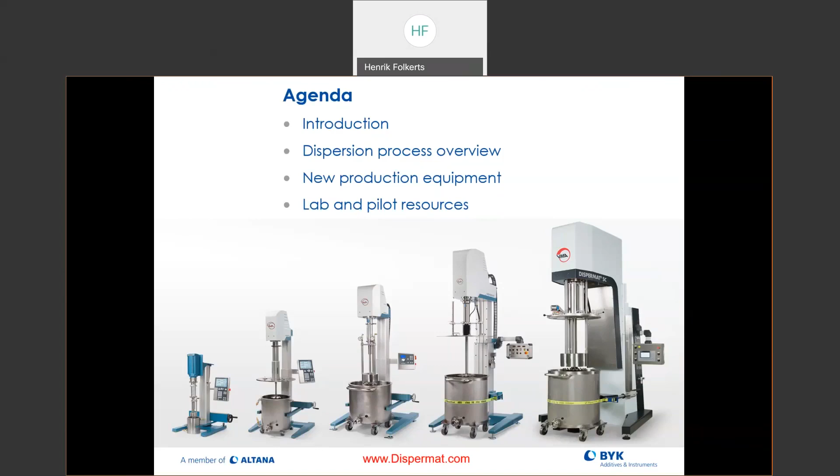Briefly, the company VMA, the Dispermat company, was founded in 1972 by this really beautiful couple, Hermann and Elke Getzmann. Believe it or not, Hermann is still active in the business today. His two sons, Christian and Martin, are running the company, and his wife Elke retired a couple years ago from accounting. But Hermann is still in there a few times a week to make sure they still follow his design philosophy, and he's a great presence.

The first Dispermat was introduced in 1973, almost 50 years ago, and believe it or not, we still have some customers running, even in the US, that imported those machines in the late 70s, early 80s, running on the original motors from the first Dispermat edition that came out in 1973. Even today they're still working just fine. The only thing they updated were the control boxes, but that speaks to the quality of the motors - they're just unbelievable.

BYK has had a really good relationship with VMA since the mid-80s, and all of our manufacturing sites and laboratories use VMA equipment. We started distributing the product line exclusively in the US and Canada in 1988. About 3 years ago, we made a decision to introduce production equipment to North America, and it's been very successful because of some differences I'll share with you as to why this is really good technology to use in manufacturing.

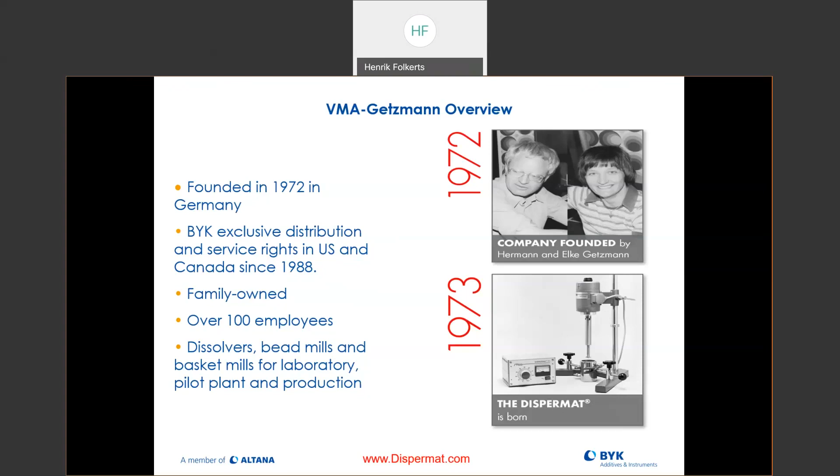So right there is the facility. The building back here is the new building that was added 2 years ago, so they have a lot more production capability. There's a new design center, more office space, as well as warehousing space for raw materials. VMA is known to really make a lot of custom products - probably 40% of all the equipment that VMA manufactures is custom to meet our different requirements.

We also have very good laboratory capabilities for lab, pilot, and production upscale to show our customers how well the equipment performs. We are actually building a pilot facility in Wallingford that gives us additional capabilities, probably later this year or early next year.

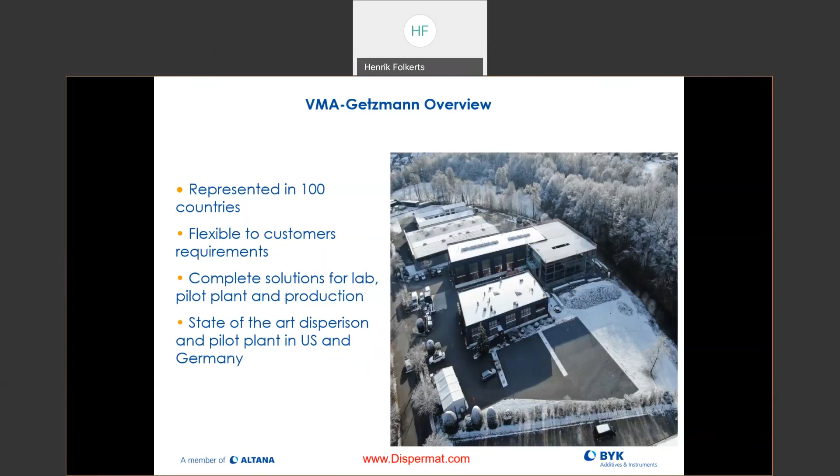Going right into the dispersion process, what's really important is to understand that pigments flock together. These van der Waals forces basically are binding forces that turn the pigments into agglomerates. The whole idea of the dispersion process is to really break up these binding forces, turn them into smaller particle clusters called aggregates. We do that with the dissolver.

And then if we want to go down to the primary particle size, we really need to do media milling with either a horizontal bead mill, a basket mill, or some other type of bead mill or three-roll mill that has enough shear power to really break up these aggregates into smaller particles. And then at the end, when we achieve our goal, we need to stabilize these smaller particles. So we have a lot of different additives through our sister company that we could review with you to help stabilize our small particles in the suspension.

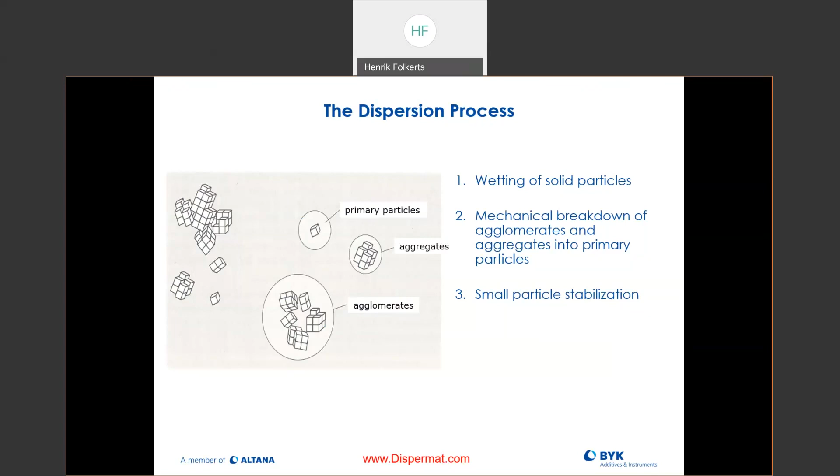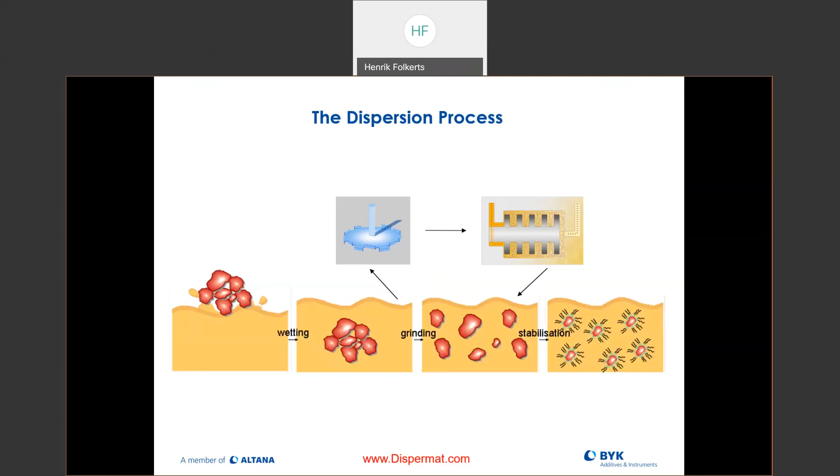So this is a great slide, I really like it. It shows you the steps. We're going to first do the deagglomeration and the wetting with our cowles blade. And then if we want to further separate these binding forces down to the primary particle size, we need to do the grinding with the media mills. And then at the end, we do the stabilization with the additives.

So it's just a quick slide showing you the difference in particle size from the various pigments that are out there. Probably a lot of you are very familiar with some of those.

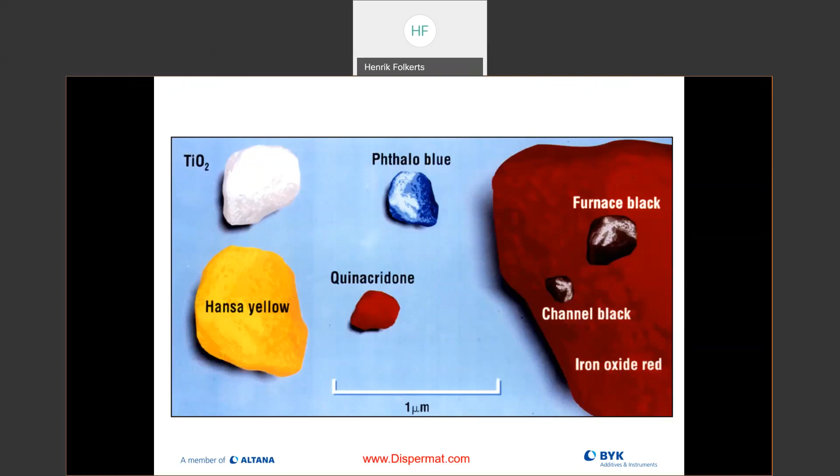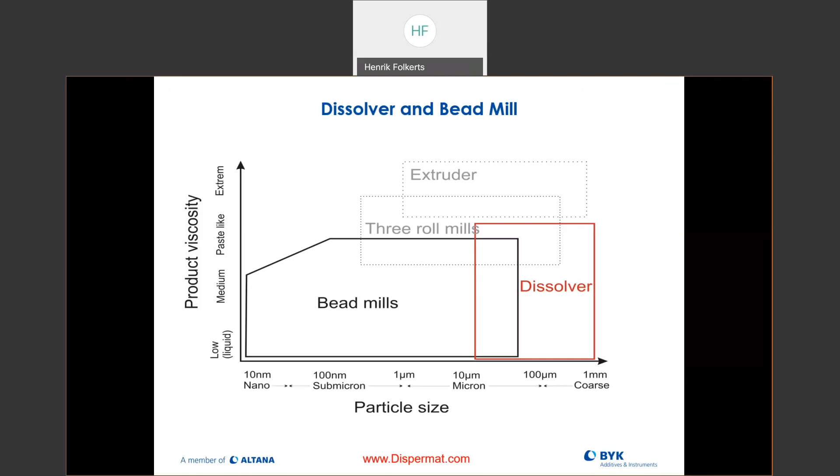So for that, we have different types of equipment. For these two processes, for the pre-dispersion we have the dissolvers, and for production we have the Dispermat SC, which we're going to cover. What's important to remember is the tip speed always needs to be between 18 to 25 meters per second. That's the rule of thumb, and that's where we optimize our dispersion process.

When we go over to the fine dispersion, or milling, or grinding, the tip speed of our rotor is slower, about 10 to 16 meters per second. That's just the rule of thumb. And for that, we have different types of milling systems: vertical bead mills, basket mills, or horizontal bead mills, and we cover all of those with the different technologies that are available.

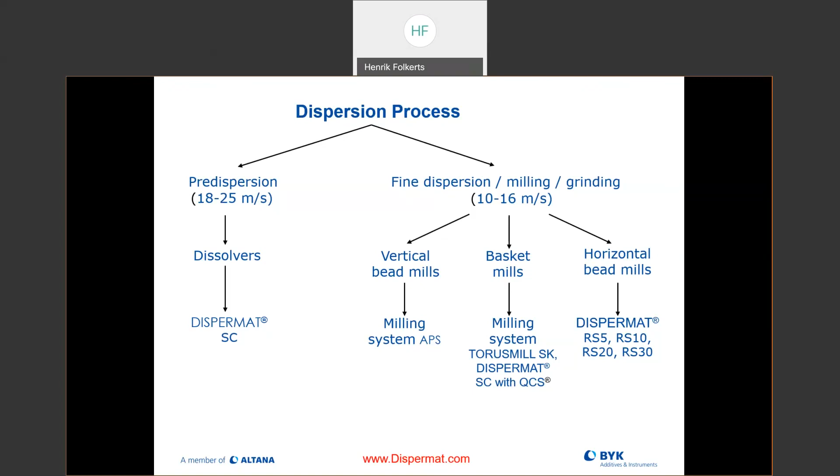So obviously there are many different arenas where the Dispermats are being used. Probably some of those apply to your manufacturing arena. The most popular ones, obviously, are pigments and additives, where they're mainly used. A lot of new markets too, like cosmetics or 3D print media, as well as the lithium-ion battery markets, which are very popular at the moment. They're all looking at new equipment since these are markets with a lot of growth potential.

For the adhesives arena, we have some very unique solutions for manufacturing, where we can apply a vacuum solution with a wall scraping system to properly move the product and also take out any type of air, which allows us to better process the material.

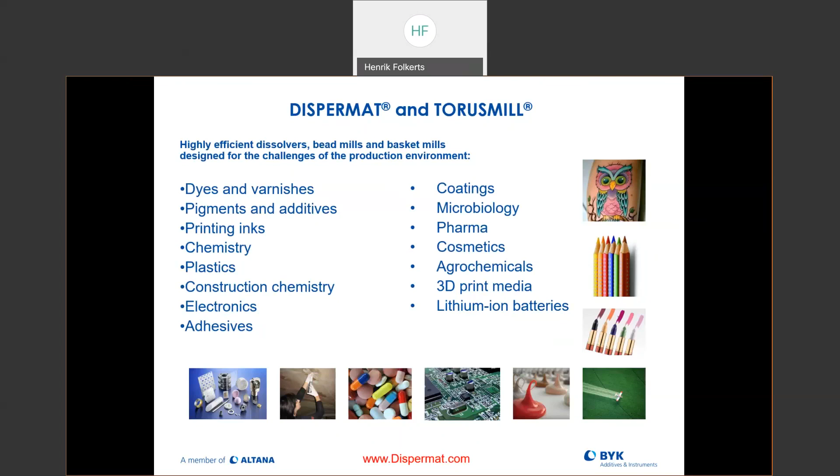So here is a great slide of a customer that has all different dispersing and milling equipment. Beautiful machines, as you can see, these are like the standard dissolvers. And then over here in the front, we have a basket mill design. The unique great thing about the Dispermat line is the modularity. That means you can turn a dissolver very quickly and convert it over to a basket mill with this QCS system we're going to cover, allowing you to do two processes on one machine. It saves you a lot of space, as well as maintenance costs, because you're really only buying one piece of equipment for your entire pre-dispersion as well as milling needs.

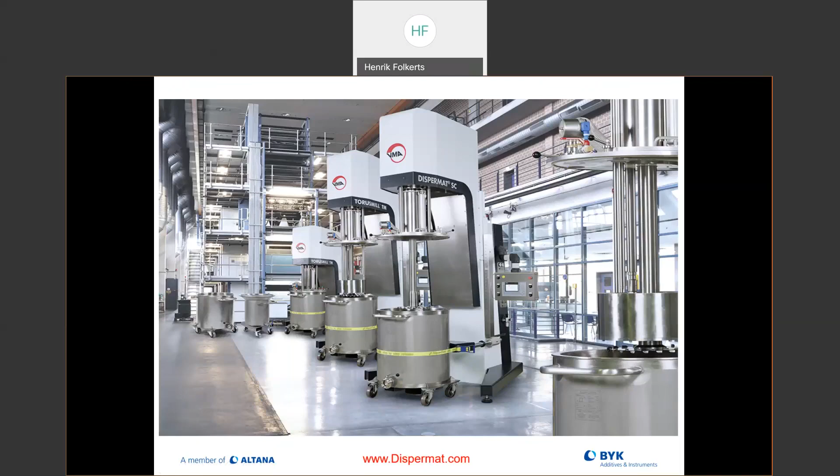So that's the model right there, the Dispermat SC. We can go up to about 2,000 liters of product volume with a 2,500 liter container, either single wall or double walled. We have this new QCS system, which is basically a quick change system that allows you to rapidly move from a dissolver over to a basket mill and back and forth. So it's a dissolver basket mill combination.

You can have the vacuum upgrade if you want, that's available, as well as the cover can easily be removed to have better access for cleaning. And then obviously certain materials require a wall scraper, so that's also an option we have available, as well as different explosion-proof additions that are also available for the SC model.

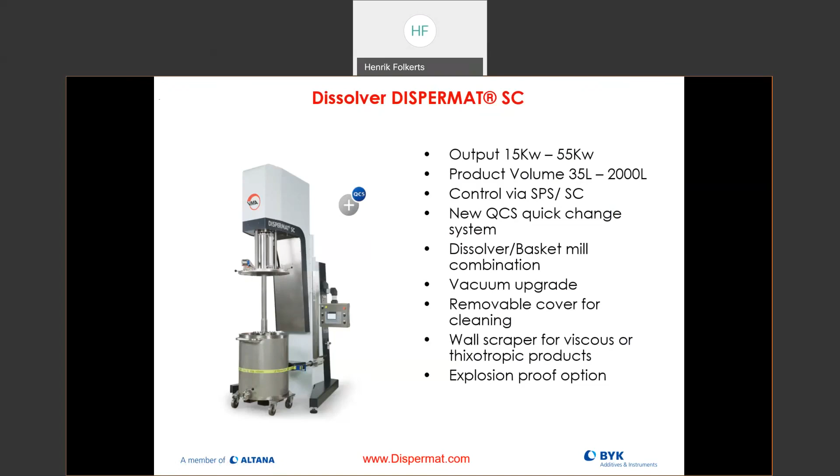So here's what that QCS system looks like, the quick change system. It basically allows you to make that changeover from one basket to a dissolver disc, or back and forth, or to different baskets in less than 2 minutes. So you can imagine how quickly you can change colors now. The machine is not tied up for cleaning.

Basically what a lot of customers are doing, they buy several baskets, one for each color family, and then they just move between the baskets as they're changing or moving from one color family to another. It's really nice. You don't have any real downtime with the equipment, and not a lot of cleanup because they dedicate these baskets to their color families, and that really saves customers a lot of time and money.

We also have a ceramic option for different products that require ceramic-lined milling chambers, as well as ceramic milling discs, especially if you're processing really light materials or TiO2 loaded materials. You really don't want the stainless steel discoloring your product. So for that, we have the ceramic option.

And then these systems also have the ability to be equipped with a rotor stator, so you can seamlessly switch back and forth between basket milling or rotor stator, or just use it as a standard dissolver.

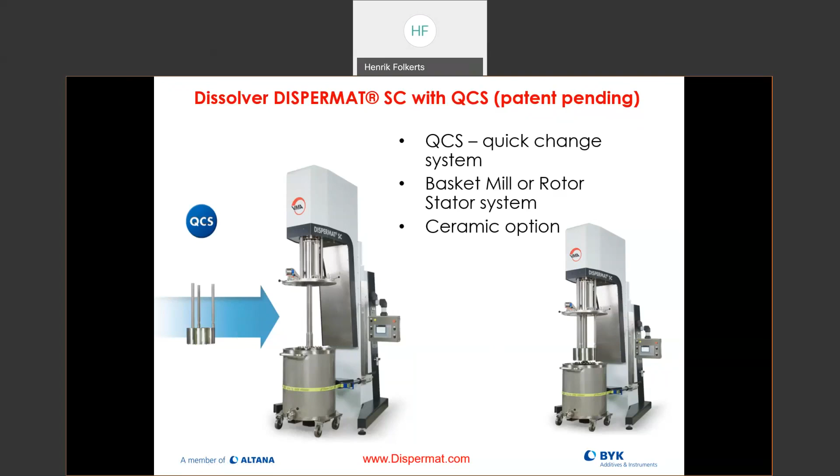We also have the vacuum option for the SC model, which allows you to achieve better wetting and dispersing effect. You can imagine the air entrapped in your mill base acts like tiny little air bubbles - these are air matrices that basically buffer the shear forces. So by removing that, I have more direct impact of my shear forces on my pigment in my mill base. Therefore, I'm improving my homogenization. I have the ability to put in more energy.

And a big deal is also the foaming. I'm able to draw out all the foam. Therefore, my product transfer efficiency goes way up, and that means cost savings. For some customers who want a nitrogen blanket in there, an inert gas, that option is also available for certain materials.

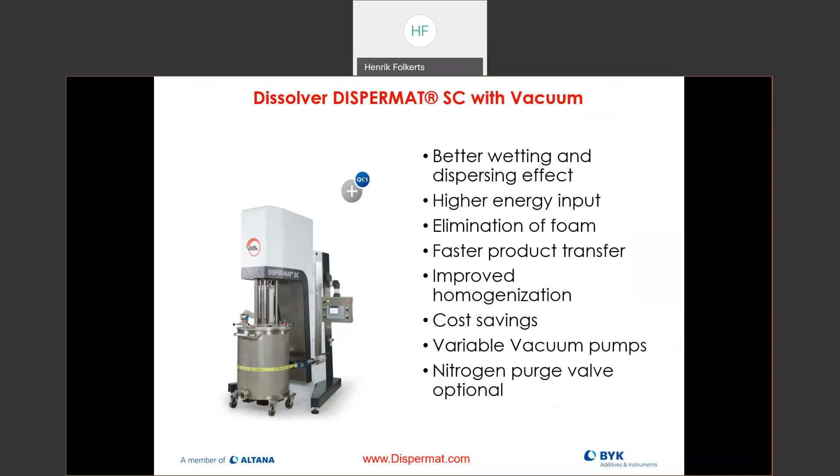This is what the cover looks like. It's just an example of a smaller production vessel with the vacuum capability, as well as the nitrogen purging valve. On top we have a viewing glass, and there's a light on the inside, so you always see what's going on and how effectively the vacuum pump is removing the foam or air bubbles.

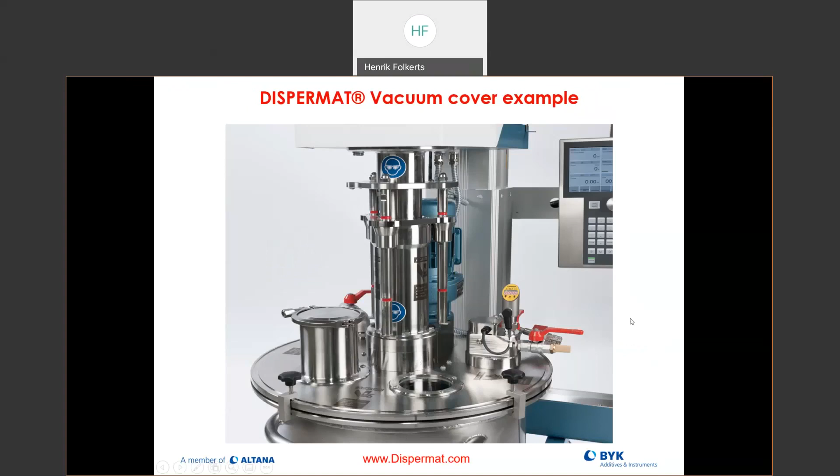So it's a really nice system that can be customized to your specifications.

Each batch can be stored by name, to the point where the impeller blade is always at the exact same height in the container when you're running the same process again. So you can just say, today I'm running blue 101, then recall it, and all the process parameters will be exactly the same every single time you run blue 101.

And then you can also send your data over to a computer and watch the entire dispersion process in real time, and basically be in command of the entire process from start to finish. It's a very good solution, allowing for very reproducible results.

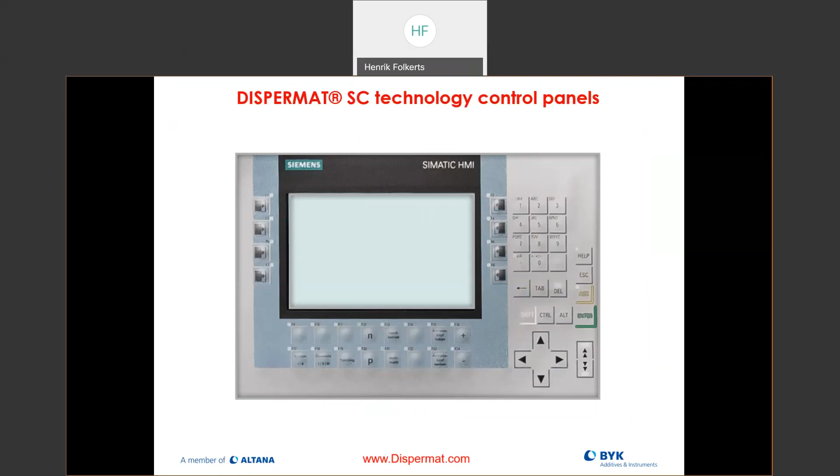We also have some customers that want their own control capabilities, so we have this programmable pad that allows you to fully operate it with your own software. We have a pilot plant facility in Germany where we can show you this type of equipment and try out different solutions, and we're actually building one in Wallingford as well.

So here is this new system called the Dispermat TM, which is basically an integrated system where a basket mill and a dissolver are all on one machine.

So as you can see here, I have a container with my mill base, my pre-grind. I put it under the machine, then use my dissolver blade to properly deagglomerate my mill base. And when I'm ready to do milling, the basket gets lowered from the top down into my container.

Now I'm doing milling all on the same machine. The Cowles blade now acts as a vortex wheel to suck the material out of the basket and pump it back around to the top, where you get a really nice movement of your product inside the container as it's being milled. Then when I'm finished, I just remove the container.

So you can already see the huge advantage: I can do everything on one piece of equipment, and I don't have to move my containers around the facility from a dissolver over to a milling piece of equipment. Everything can be done on one machine. It saves you a lot of space as well as cost savings, because now you're only buying one piece of equipment instead of two.

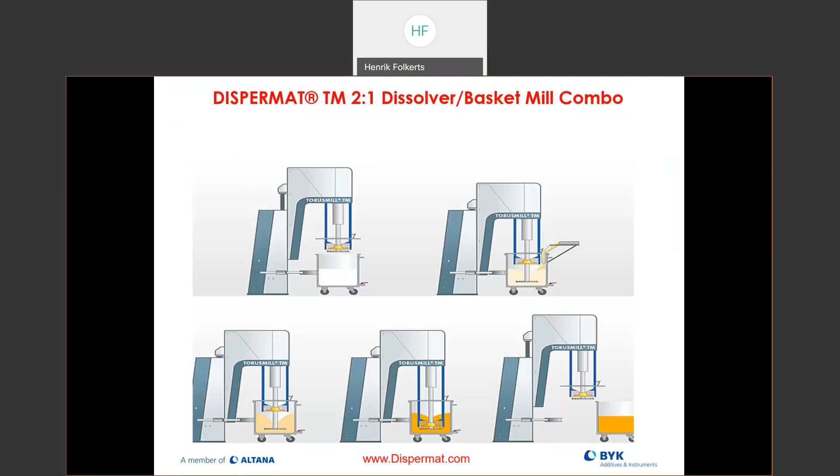So this is what that machine looks like. We can go up to 1,600 liters of product volume, and you can see the basket mill is on top, and on the bottom we have the dissolver. When we're ready to do milling, we just lower the basket with the push of one button, and now we turn this whole thing into a functional basket mill.

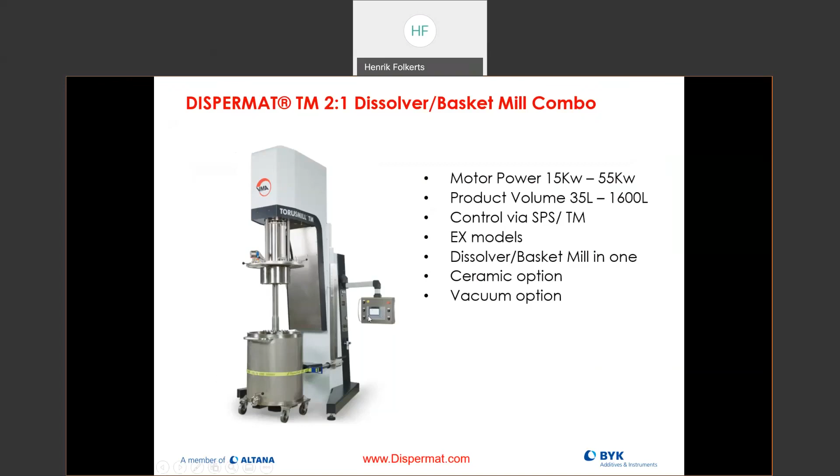We have explosion-proof models available, also with the ceramic lined option I referred to earlier, and a vacuum option is available too. So I would recommend this system for customers running one particular product or one color all the time, without a lot of color changes, because on the TM it's more difficult to swap out baskets. If you have a dedicated color, this is a great solution since you really only need that one piece of equipment.

Here you can see how the basket goes up and down. It's also very easy, which is really important, to upscale from lab to pilot to manufacturing. So our small laboratory TML mills can be upscaled at a ratio of 1:1 to our manufacturing TM - that's also really good. If you already have a Dispermat with the TML, you can rest assured upscaling will be very easy.

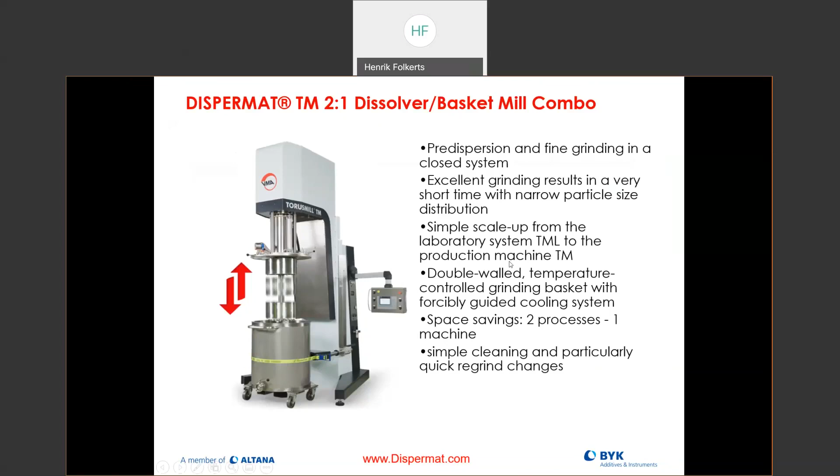Also, the cleaning is very simple on this design. And if you want to quickly change batches, it's a breeze with this design.

Here is a customer in the Midwest that purchased two of the TMs, Dispersion House, and they're running them for dedicated products - they really love the machines. In the backside of this facility they have a lot of competitive machines, either basket mills or dissolvers, and they basically said, with your equipment we don't need to waste all this space. We have everything we need on one machine for pre-grind and our grinding. So it's a huge benefit to them and they really appreciate the design.

So then we also have just a dedicated basket mill, not a dissolver. If somebody says I have enough dissolvers, all I want to do is just mill, then we have that basket mill, the SK.

And again, here you can swap up the baskets very quickly. We have the quick change system available, which allows you to go in between baskets very rapidly. I would say a color change or basket change can be done in under 2 minutes.

So with this design, we have a stand on wheels, and you just roll it up to the machine, and before you put the basket onto the stand, you run it for a minute to get rid of all the excess mill base. Then you transfer it over to the stand and push it away, and just push in a new basket and hook it up. It's a really easy way of doing it. That's the QCS system that only VMA Getzmann has for their production scale dispersion equipment.

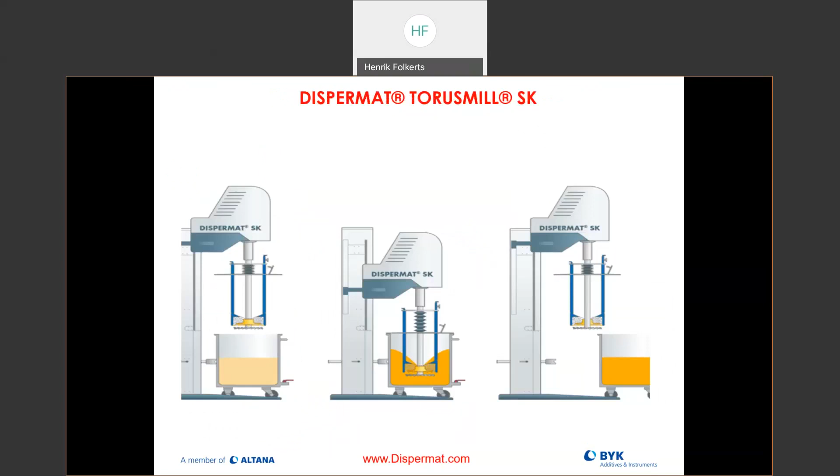What's nice about the SK is it's also future-proof, in the sense that you could theoretically modify it, because it has the QCS system, to also add the dissolver. So you can also back-convert it to a dissolver if you want to - you're not stuck with just a basket mill. If your future plans or needs change, it's always backwards compatible, which makes it a really nice future-proof system for your manufacturing needs.

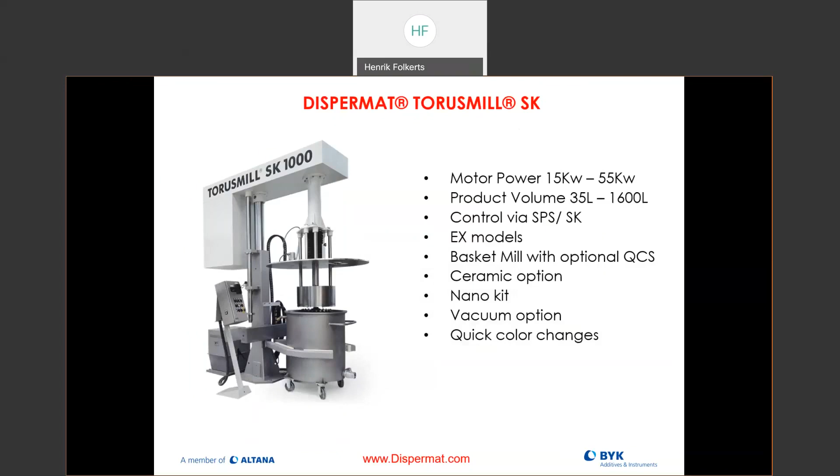The design of our basket mills: we have a double-walled basket because most of the energy that's being created is actually right in here. We have a vortex wheel on top that is patented, that basically sucks the product into our basket.

On the bottom, we have a milling disc. You can see the beads right there, held into the basket by the screen on the bottom. Below the screen, we have another vortex wheel, like a Cowles blade, that does two things: it draws the mill base out of the basket and pumps it back around to the top, giving us a nice circulation of the mill base through the basket and around the container.

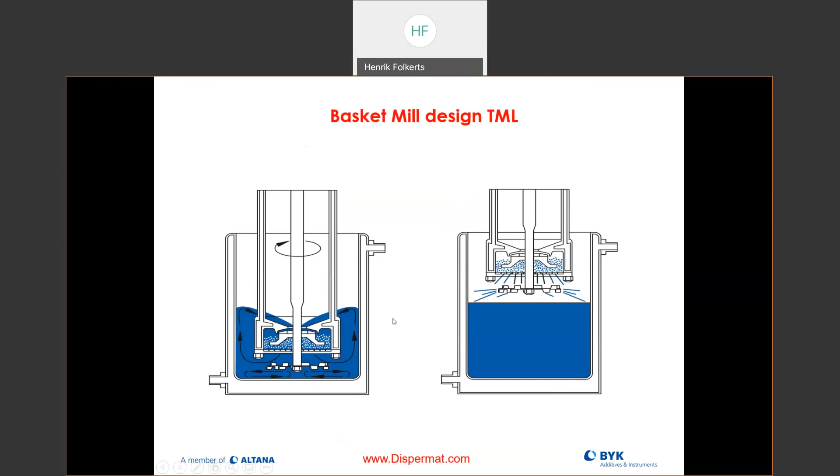It's very efficient. So the larger basket setup looks like this. We have the bead feeding area right here with a nut. You loosen it and then use a funnel to add the beads.

These two rods right here are for cooling in and cooling out. On the back, we have a third rod, and that's actually how we measure our temperature. We don't measure the temperature in the vessel or the container - we measure it directly inside of the basket, because that's where most of the energy is being created, and that's where we get the most reliable reading.

Also, on the manufacturing scale basket mills, we are not only cooling the sides of our basket but also the top portion - all of it is double walled, so we have a really effective way of cooling the mill base with that design. A lot of other companies have screens on the side, which is okay, but we believe it's better to cool where we are milling, which allows us to properly keep the temperature in check.

Now we also have a horizontal solution for manufacturing as well as the lab solution, the SL, which some of you might be familiar with. I will share a slide at the end - this is our production unit, called the Dispermat RS.

It can also be configured for different sizes and different milling chamber volumes. We have explosion-proof models, using either the C technology or the more simplified M technology package, depending on how much data collection, data tracking, and control capability you want. We also have the ceramic-lined milling chamber as well as the ceramic rotor - we can use a PTFE rotor, or different types of ceramic like silicon carbide, depending on the material or hardness required. We also have standard stainless steel or hard steel.

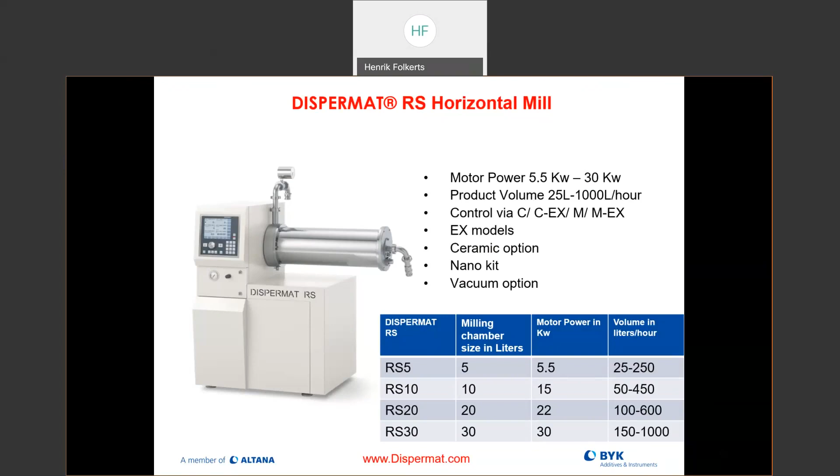Lastly, we also have what's called an APS system. The APS system is more designed for laboratory scale - it's a very quick way of milling. We have basically two containers: a top container where we do our pre-dispersion, swapping out the milling disc with the Cowles blade, and then when we reach our desired particle size, we add the beads.

The beads are held inside the container with a screen on the bottom, and there's a drain plug. So then I'm doing my milling - there's a lid that goes right on top and seals everything to make sure no coating spills out. Then I'm milling with my media, and when I'm ready to purge my material, all I have to do is hook up an air hose to a socket on top and remove the drain plug.

With air pressure, I'm forcing my mill base out of the container into the container below, so now I'm only dealing with the beads left in my container, held back by the screen. For cleaning, all I do is put the drain plug back in place, fill it up with cleaning solution or solvent with the right polarity, run it for a few minutes, and then drain it the same way.

So that's a really nice way of milling smaller volume. Unfortunately, we can't go super large scale with this. The largest volume is about 30 liters. We made a custom system, but this system is mainly designed for the laboratory and small pilot trials.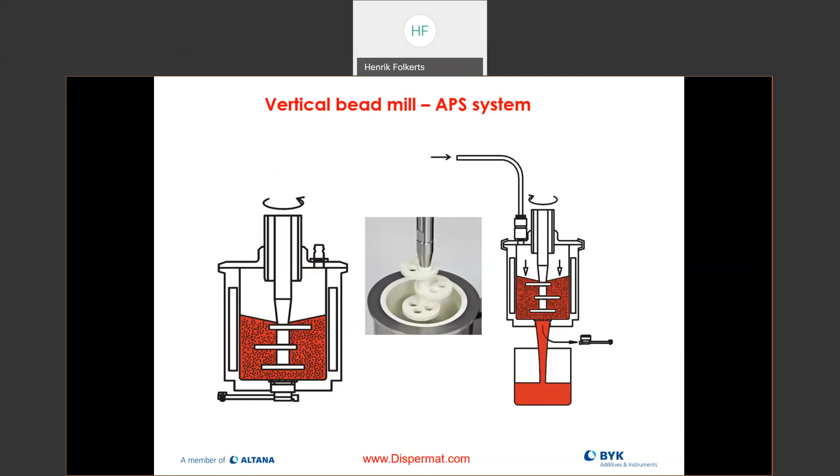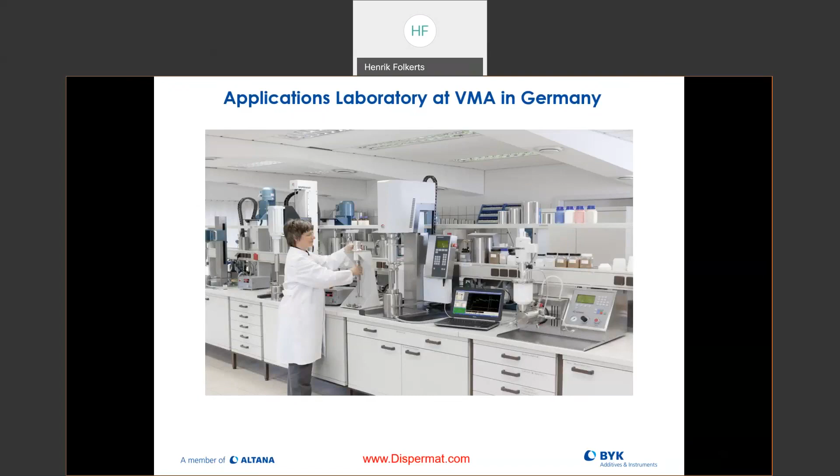Okay, then we have different laboratory resources. We've got an applications lab in Germany with all different milling equipment as well as dissolvers. So if you are globally based and want to do a trial in Europe, we'll be glad to help you there. We also have a VL vacuum system available and a really friendly staff helping you through all your dispersing needs.

We opened up the lab in Wallingford about 2 years ago. It's very successful with our sister company, the BYK Additives Group, and we're also able to do trials up there and have customers come in. Right now it's blocked for visitors, but hopefully once COVID passes soon, we'll be able to host customers.

At the moment, what we do is live video trials. We have a setup with cameras so we can show you exactly how the machines perform with your product, and we can do an entire simulation of your process and help you improve the products.

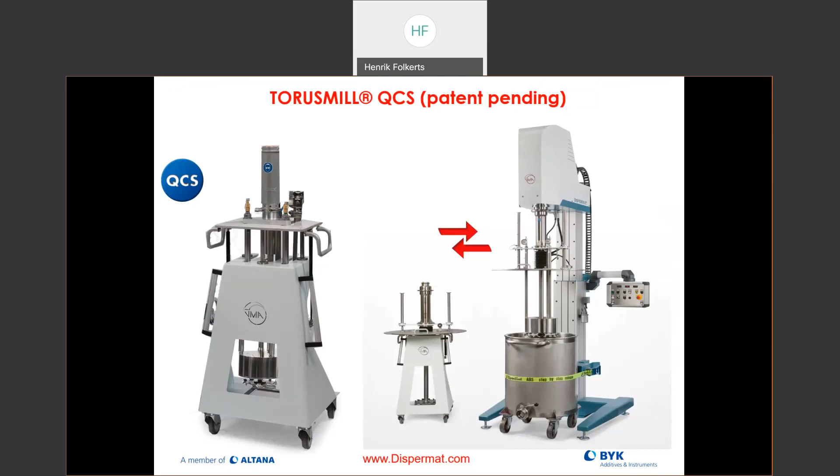Yeah, so just a few things. Obviously with our SC technology, that really came out last year and this year. There is going to be a new software package called WinDisp. We already have an older version of WinDisp. The newer one will be a modern way of tracking the data and controlling everything remote from a PC. There'll be an upgrade where we eventually will allow you to send all the live data to a mobile device.

So if you're not present in the facility and you want to know what's going on, if there is a problem, the machines have the ability to program cutout values. Let's say your temperature goes over a certain threshold, or the machine's power input requires more energy because your viscosity is changing. You could put a flag there, and it will notify you if there is any sort of change in the process that you're not foreseeing. You could then either turn it off or allow the machine to run at a different setting. If your temperature goes over a certain point, instead of just turning off the machine, you can program it to reduce the speed, let's say instead of running at 500 RPMs, run at 100 RPMs or something like that. So there are multiple ways of modifying it, and the new software is just a nicer way of displaying all the data and the dispersion process in real time.

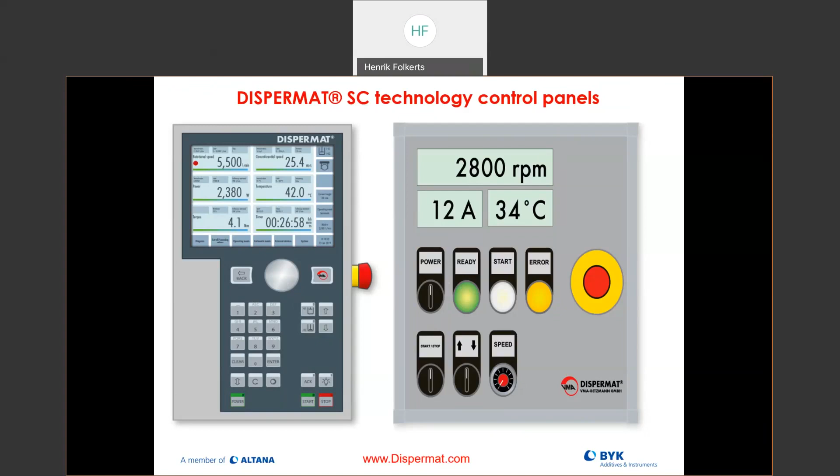One I want to mention, which is always interesting for lab stuff, is the safety feature we call the working area. We have an ability to set a threshold, an upper and a lower threshold of where you can operate the Dispermat. Depending on the container, you can move the thresholds. But let's say you set it right here, and someone were to inadvertently lift up the shaft while the machine is still running - it would automatically power down once it crosses that threshold, so there is no moving blade outside of the container.

On production scale, that's not really a problem because we have a lid, but that also has the safety features as well. And then we have the container clamping system right here that ensures the container is not only centered but also properly clamped. If there is an issue, the machine will tell you on the display and say 'not clamped properly, please secure the lock in the container,' or the machine will not power on.

Also, if your blade is outside of the container and you set the threshold here for the upper limit - we call it H1 and H2 - if it's outside that range, it will also tell you on the display and will not power on until you lower the blade back into the working area. And then the lab models also come with the shaft protection pipe, which you can move to ensure that there is no rotating shaft outside of the container as well.